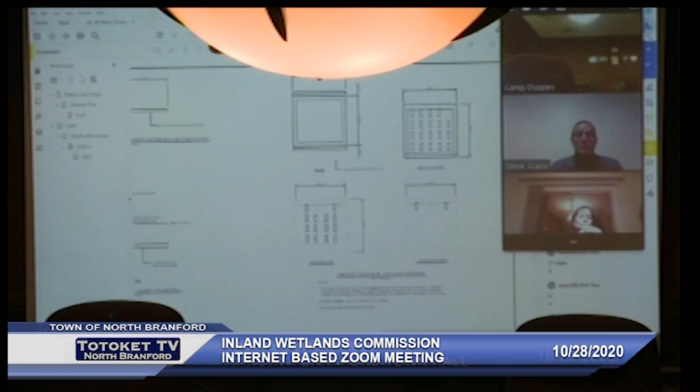May I ask a question at this point? Sure.

These galleries you're talking about, that's exactly the same thing I have for a leach field, 80 feet of them for my home septic. So are we talking here about just catching the runoff from the roof? Correct, correct. Is there anything else going into them? No, just the roof. It's a closed system, really.

If you think about it, the rainwater and snowmelt comes off the roof, goes down the rainwater leader, connected to a pipe that goes into the galleries, and that's it.

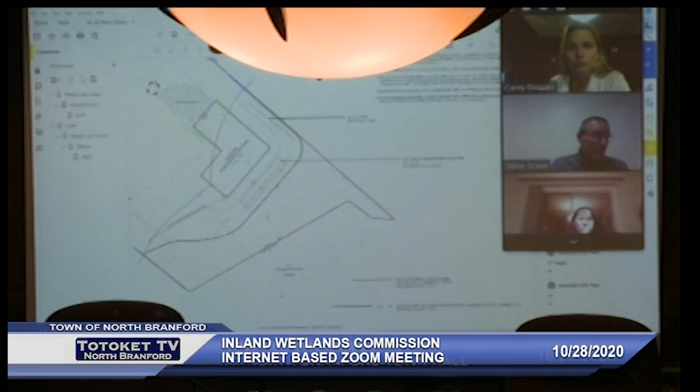And what kind of roof are we talking about on this building? The material? No, I mean the shape. Does some of it shed forward, does some shed towards the river, or is it a flat roof? I think it's 2 gabled roofs, Jerry. A ridge this way, and a ridge this way.

I believe there'd be gutters around the perimeter, here, probably here, I would think, here and here. And the square footage of the total roof space? I forget, but I submitted calculations to Kirk. I can try to find them while we're talking, but I did submit them.

The reason I'm asking this is because it seems to me to build this system to catch the rainwater in back may be more of a disturbance within the wetlands than is actually necessary. This seems pretty excessive just to catch rainwater. I'm not an engineer, of course, and I don't know that for a fact. But it just seems like you're talking about 4x4 galleries, 150 feet of them. That's an incredibly large tunnel under the ground. Is all of this really necessary, or are we overbuilding to satisfy certain regulations?

So every town now is subject to the Connecticut DEP's MS4 permit, the municipal separate storm sewer systems. You've probably heard the MS4 terminology. One of the requirements of that permit is that municipalities by a certain date include revisions to their land use regulations that encourage practices like this: low impact development practices, stormwater treatment and quality practices. I think the town engineer, when he requested this, is simply trying to meet those requirements.

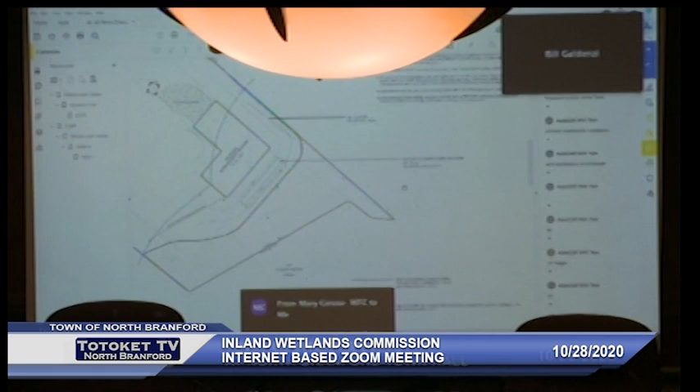So there's a couple ways to do it. The roof water could be allowed to be discharged to the ground, and when the ground surface is very flat, which is the case here, and where it's wooded and has a thick forest layer, similar to what we talked about at Fowler Road, the roof water can simply come off the roofs and be discharged to the ground, allowed to spread over that area and infiltrate into the ground. It achieves the same thing.

The town engineer requested a more formal infiltration system, that's why the galleries.

All right, well that's precisely where I was going with this. I was wondering if the discharge could just flow as a sheet through the forest floor and be infiltrated on its own. When we were working on the Shantz Farm development, we talked about an alternative development means, at the time called low impact development, which would have eliminated curbs from the street, eliminated culverts, eliminated piping of the water, and it would have all worked by sheet flow.

But it was felt at that particular time that the North Branford Town Works wasn't really set up to deal with that sort of development at the time. It was kind of new to everybody, and I think we were kind of slow to adopt it.

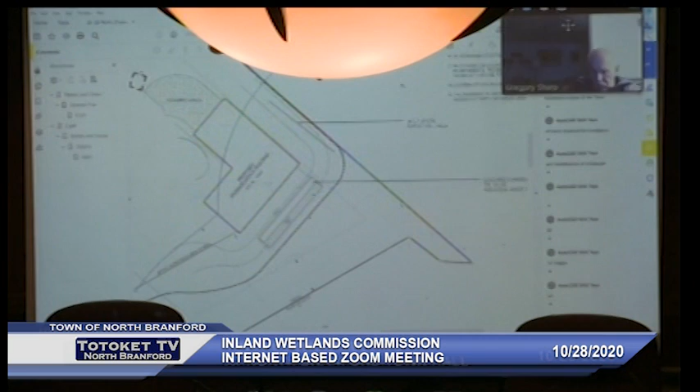It could, and Kurt's trying to. Nothing wrong with what Kurt requested. Kurt's trying to do the right thing.

The only perspective I was going to add is this is more common that we're seeing in some of the newer developments and projects we see on the zoning side that don't have really inland wetland impact. So you guys wouldn't see it, but we're seeing it more in zoning, and this is becoming more common.

This is not abnormal, Jerry. No, I didn't think it was abnormal at all. I actually fully agree that this is the norm, but I thought that there might be less impactful ways of addressing this that have just been slow to be adopted.

I'm thinking about what you've said, Jerry, and other alternatives, and as I stare at this, having been out there today and walked in the woods right down to the river.

What I would suggest we don't do is simply allow the rainwater leaders as a point discharge to just discharge to the ground. We would need to spread it out.

You kind of mentioned this, and on this particular site, it occurs to me, and I've just thought of this now because you just brought it up: to spread it out, instead of building these galleries underground, you'd have to construct some type of a level spreader. Exactly, much in the same location.

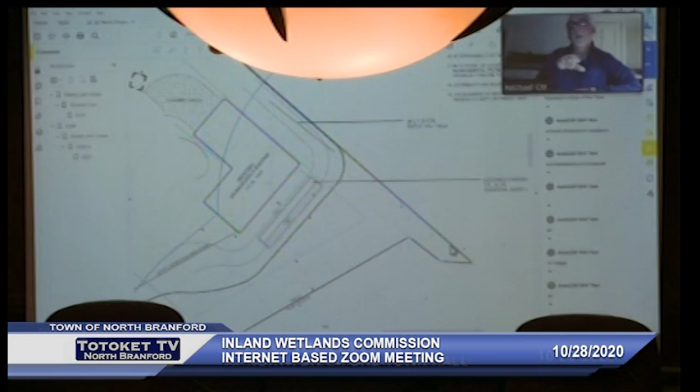It could actually, and I hope we talked about this. This filling and sloping is related to the installation of the galleries, in order to cover the galleries and then slope down. If these galleries went away, this back wall would have more exposed foundation, whatever material it is.

Concrete. When you stood back here and looked at it, you'd probably see, like you said, the top of the foundation wall would be around 153 and the ground's about 149-ish or so. So yeah, you'd see about 4 feet of exposed wall.

But no one would see that unless they were standing back here. Correct. But that leaves us with the galleries — we can't put those galleries down at the existing grade. They've got to be up high to stay away from the potential groundwater issue.

We have to provide a vertical separation distance to the groundwater table, and that's why I've got them set up high, and that necessitated the filling. So if you're correct, if you took these galleries away, you would not have to grade as much in the back of the building.

If we go to the level spreader option, we would still disturb the area, but we would not be raising the grade. We'd actually want that level spreader down at elevation 149 or so. So we'd still disturb this, but we would not be placing fill because we would not be trying to cover these galleries.

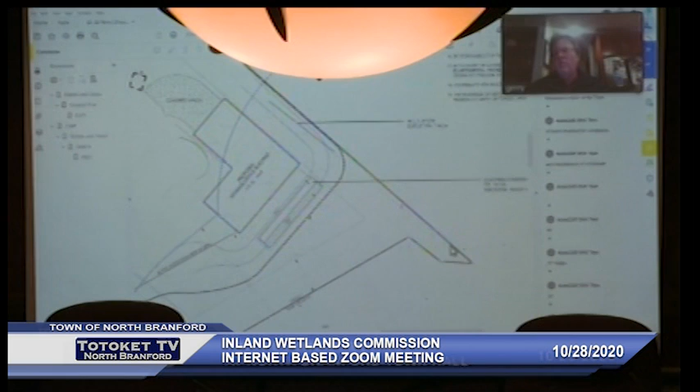Mike, one other thought that follows this discussion. Does Aquatic, I know they do a lot of landscaping services, do anything like rain gardens? I'm thinking they could put something like that in to serve two purposes: one, it would be an alternative like Jerry's suggesting, and also it could serve as a display point for the business. That's a good idea, Carey. I don't know if they do that, but that's a good idea.

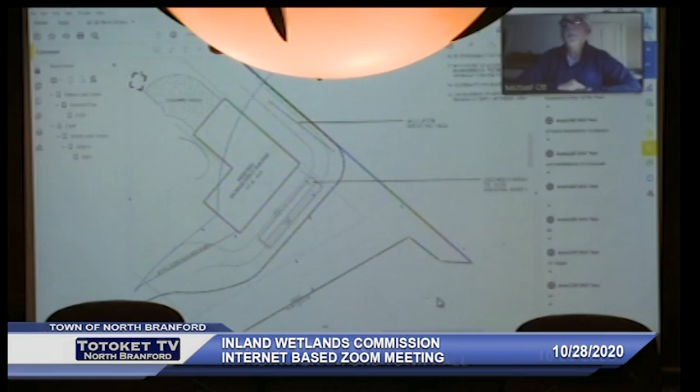In other words, the level spreader, I think what you're saying would actually be incorporated in a rain garden design. Right, and also serve as a display point, because I don't know if they'll be relocating the display walls, but they have the pools and everything else along with their stonework and fence work. That's a very good point, and relatively easy to do, and truthfully much less expensive than all these galleries. So yeah, I believe that could actually be done, as long as you're okay with, we still have that disturbance, but what we'd end up with is a rain garden, a vegetated area that's handling the roof water.

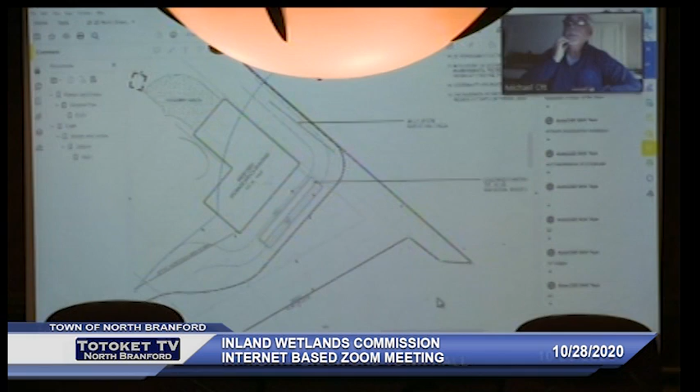Mike, were you able to talk to the owners and ask about a redesign where it's one straight building and up further so it doesn't disturb as much into the review area? I did, Ashley. The owner went through a process with his building designer, like most owners, with their program and their needs and requirements for what they want to do with the building. They did look at initially a rectangular building, and they did look at sliding it up, but my understanding is that their requirements for what they want to do within this building and the storage area they need drove this L shape.

One of the reasons it's back so far is the fence on the display pool. If you remember, there was a decorative black fence all the way around the display pool, which is required by code. So in order to get this L in, they only moved it as you can see here. This distance is probably about 4 feet off the fence. It's just enough room to walk between the display pool fence and this face of the building.

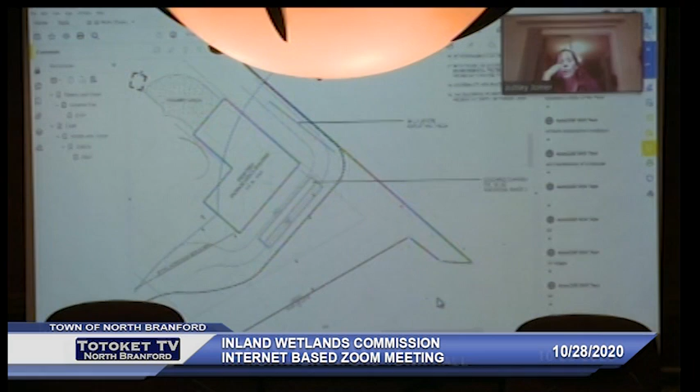So yeah, to answer your question, they did, but this is where they landed. So even though it might be comparable square footage, they needed an L-shaped building instead of even a rectangular one in the same square footage? No, I don't think that was it, Ashley. I think to get the square footage that they need, the building would be slid, it'd be up here someplace.

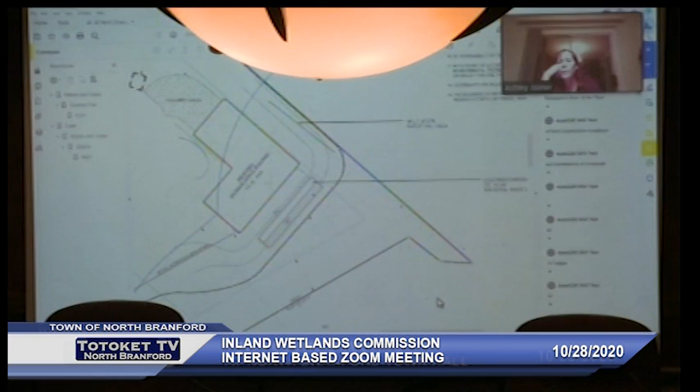They would lose their, let me pan down a little bit, their above ground display pools. I'll trace the circle, there's a circle there. Yep, and there's a circle there. This one they've got to relocate, but if they slid the building up there, they'd end up having to relocate both. Two instead of one. Okay, right.

But it's less of a disturbance into the review area, so that's why I'm wondering, if it's just to move two of their displays, can they be remounted anywhere? Well, I don't know where they could redo their displays. There's probably room, but that was their thinking, was to try to make sure they had, I think they would prefer, I'm trying to pan over here, prefer to have all their display in this area where they have it today. So that and the location of this fence drove the L shape.

As far as the location of that fence is concerned, I believe that the building, if it did slide up those 4 feet you're talking about, could actually serve as that portion of fencing, providing there's no doorway or window there. Yeah, the fence would just connect probably right to this corner, Jerry. Yeah, that's what I'm saying. So if it were an issue and you needed to slide the building those 4 feet, it wouldn't disturb the swimming pool display at all, it would just eliminate a small section of fencing.

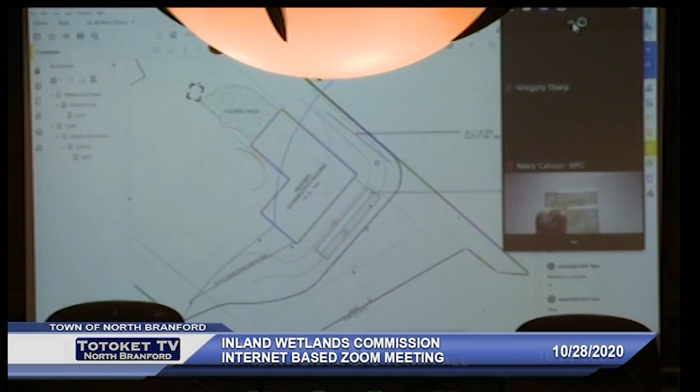Mike, were you able to find the sanitary sewer connection off to the side? When we looked, we couldn't find it, but have you been able to locate it? No, I tried again today, but actually Tom's guys, when I left, were still looking for it. So I'll have to report back to Carrie tomorrow. I told her this earlier today.

We know it's there because the surveyors located it, but I cannot find it. I kicked all around in the leaves and could not find it. So Tom Lodano's guys actually left, still looking for it, trying to find it. But we're actually not connecting at that manhole, Ashley.

We're actually up here. So it's not really part of, there's no work here. It's not part of the application. We're connecting to the sewer up here. But I did try, I told Carrie earlier, I did try to find it.

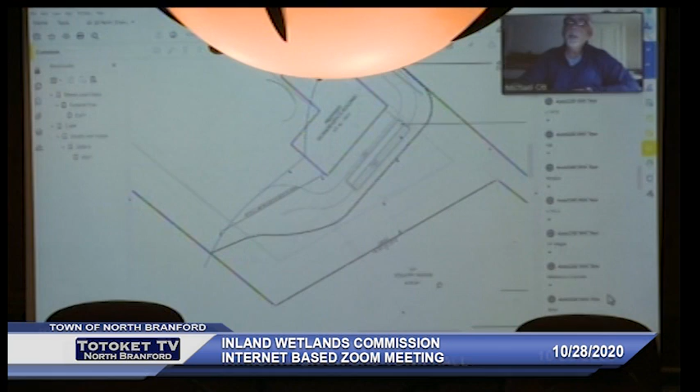I also measured to the river today, and I flagged all the trees that I think need to be removed. And I took photographs, which I could share. Carrie has them, I sent them to her, but I could try to share.

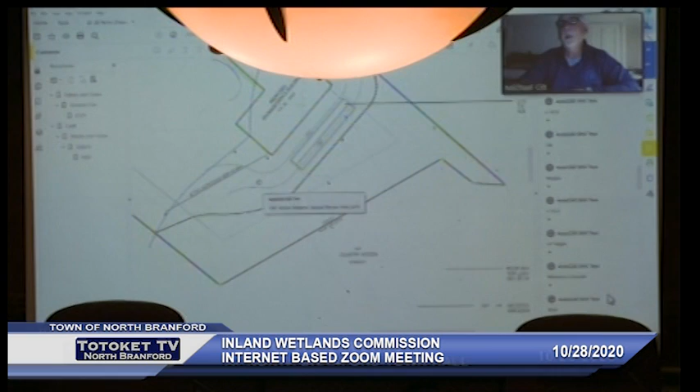Was your measurement to the river to the bank or to the center of the stream? I measured to the top of the bank, and it was about 71 or 72 feet from the front of this display wall to the top. I pulled the tape from the front of this long display wall to the very top of the bank of the river.

I knew it was within 100 feet. Yeah, definitely. And then I flagged it.

I counted 13 trees that would be removed. And I can show you those pictures. I think you'll be able to see the flagging on the trees if you'd like.

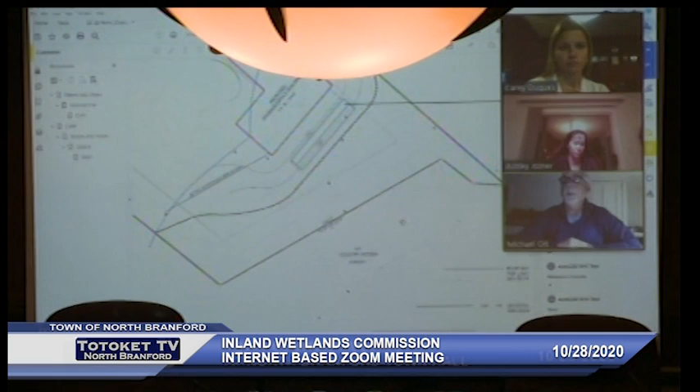You probably remember what it was like. Some of them are relatively small, a couple inches in diameter, but several of them are rather large, including that one dead one that I think Steve pointed out, or maybe it was Bill, I can't remember. Dying, I think. Dead.

So I think that's it in a nutshell. Unless you have other questions, I do think this can be done, Carrie's idea, and I can't see why we can't slide it up 4 feet to that fence either.

I'll have to talk to Tom. We'll have to look at and talk about the building design, but I would imagine we'd be able to slide it up.

I have a question, but I'm not sure, Mike, that you can answer it because I don't think you were involved with the project at the end of Ciro Road, were you? No. In that project, we had actually gotten them to turn the proposed building around and put the back of the building against the wetlands.

And I'm wondering, how did we address handling the roof runoff in that project? Does anybody remember? I believe it was through... I'll have to look. They might be connected to the detention basins because there was a basin. Yeah, I think it went into the basin. Okay, great.

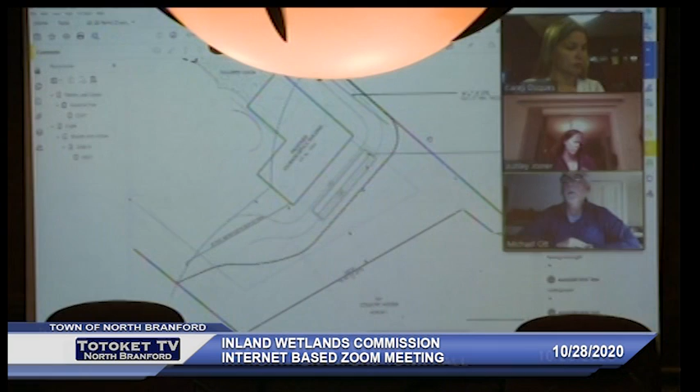So at this point, is there any other comments or questions from the agency members?

I just was wondering where we should proceed now. Should we allow Mike to go back to the applicant and express, run by some of the two main ideas, basically going to maybe a level spreader and maybe moving the building back 4 feet. Those would definitely seem to be two things that would

be encouraged by the agency at this point. So unless anyone else has any other comments or concerns, of course. I'm fairly comfortable with this whole project. I would like to see the galleries dispensed with. I'd like to see as little impact as possible.

But for me, none of this is a deal breaker. I think that any way that they go forward with it is going to be minimal impact on the environment, and I'd be okay with it, but I would certainly like to see lower impact if at all possible. And I like the idea also of the water garden and natural spreading of the roof water.

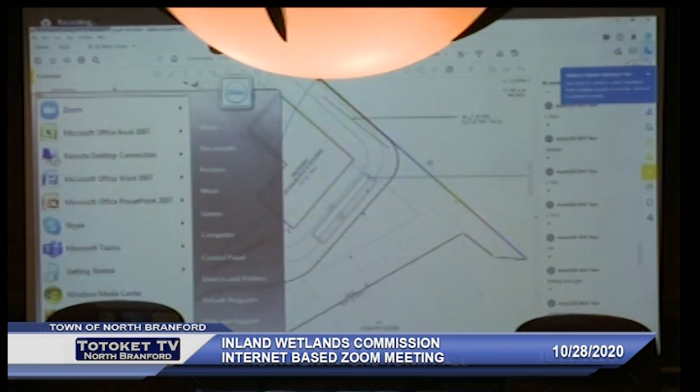If I could add, sorry Bill, I think I can safely say that the applicant will agree to the rain garden level spreader in the rear and sliding the building forward. If the commission was inclined to act tonight, I think that would be helpful, actually, timing wise. How do the other agency members feel?

I mean, I think that sounds reasonable to me. Is anyone else okay with that, or something we should consider? I guess my only question is, does Kurt have to approve the roof runoff through the garden? I mean, I would think it has to go through Kurt too, doesn't it?

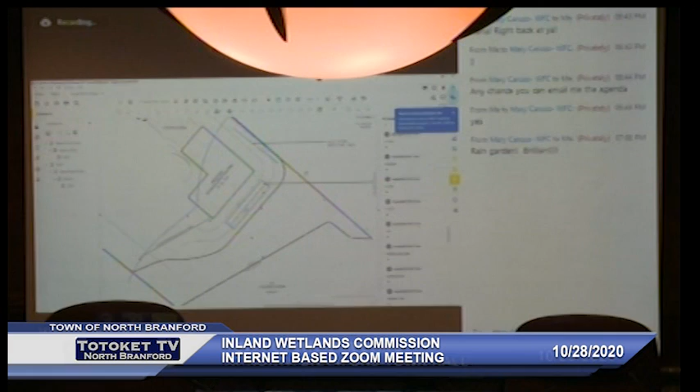I think that serves the same purpose. I don't know, what's your feeling, Mike, from an engineer standpoint? I would say, having been an engineer, I would say that Kurt will be fine with it, because Kurt's goal is, as is Carrie's, every municipality has to implement the MS4 permit requirements.

And you know, as I said earlier, the rain garden level spreader idea is just another way to do it. There's no real difference in the function or the outcome here. The whole idea is to promote the infiltration of water from impervious surfaces. That's the idea.

It's not, in this particular case, a water quality issue because it's roof water. Roof water is considered clean by DEP and in the stormwater quality manual requirements. The goal is to promote the infiltration and recharge of water from proposed impervious surfaces, which is, believe it or not, way back when we did the main building, is exactly what we did.

That's why we put, before there was a requirement, we put these galleries under the ground here. We did that because we're in the public water supply watershed at the time. Today, we're still in the public water supply watershed, of course, but now there's a municipal requirement to do this kind of thing.

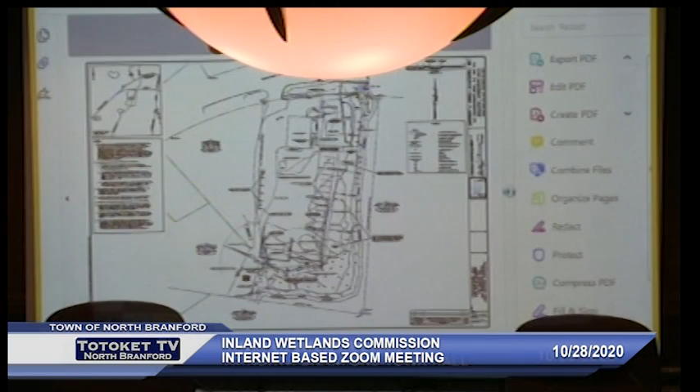Sorry, bear with me one minute. Carrie, your computer sounds like a Commodore 64. Yep, it's a little outdated here, but I'd love to say I don't know what a Commodore 64 is, but I actually know what one is. Yeah, so do I.

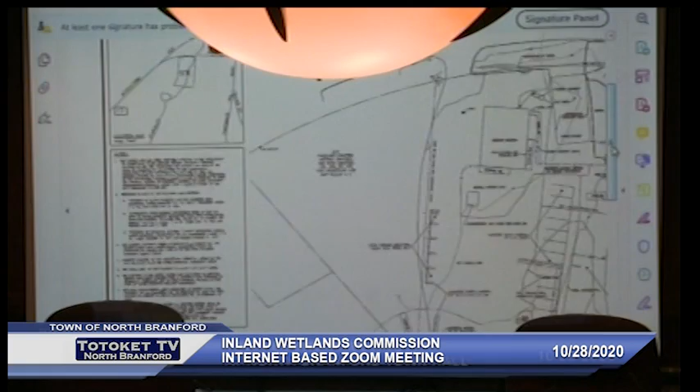Okay, Carrie, thank you very much. Okay, you can see it. I'll try and zoom in. The first thing I'd like to say is the first thing that we have to do is move forward and remove the stockpiles and everything that are currently on site. Joe, if you're available, you may want to jump in and give us some timing for that.

But our intent with the presentation of this plan is to contain all of the future area stockpiles within the existing paved area. I did some research, and I also shared some photographs, aerial photographs, with Carrie with respect to that existing paved area, going back to 2004, which was a little difficult to view because it was kind of washed out, being a black and white photograph. Would you like me to share those, Mike?

If the commission hasn't viewed them, it might be helpful just to see what was there. Okay, so this is the 2004 aerial view. Yeah, and you can't see a lot. That, unfortunately, was a black and white photograph, and it's kind of washed out.

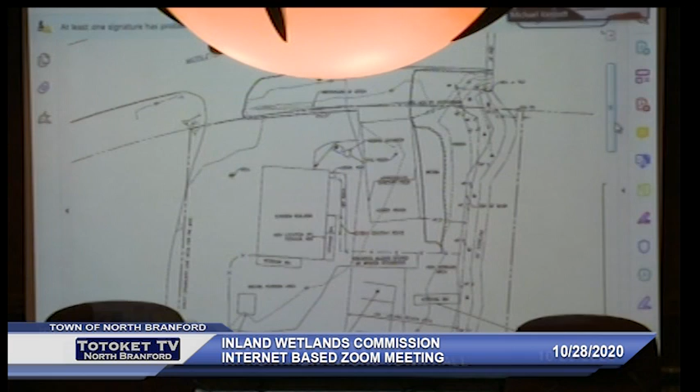On the site plan, we do show the edge of the existing pavement. What we're showing are 3 separate storage areas: 2 on the south, 1 on the east side, for wood chip storage, topsoil storage, and a fill storage area. Then north of that, you'll see some parking spaces. We made them oversized for trucks, 15 by 30 feet, so that will allow the trucks that are part of the business, whether it be the landscaping or the excavating, to have a designated area to park. For the most part, the space that we've outlined on the plan is approximately 10 feet off the edge of pavement.

If you look a little bit on the west side, we have some storage bins that would be areas where they can put their landscape sand, stone, in smaller quantities, because they might dump a truckload or what's left of a truckload when they finish their work on a job site and store it there till they pick it up and go to another site a few days later.

All of these storage areas we're proposing to outline with concrete traffic barriers. The barriers will be placed in the positions shown here. They are generally about 10 feet long, 2 feet wide, and 2.7 feet high, and that will contain the material that comes on and off the site on a regular basis, not be dumped erratically in piles around the site like you see now.

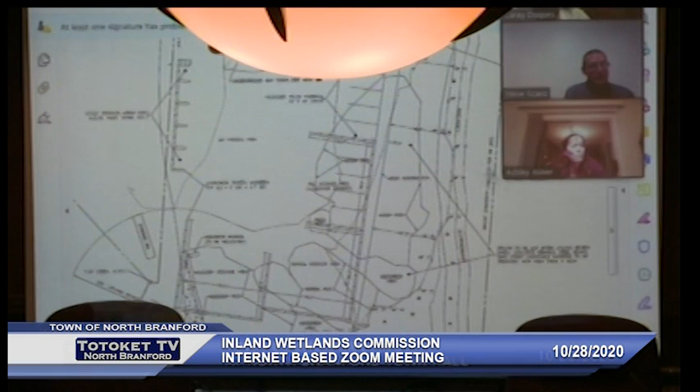So primarily, if you look at the area on the east side of the pavement, the paved parking area, you see a disturbed area and a stump pile. Once that is cleared up, we would propose to spread topsoil and seed it. My recommendation would also be to take some of the wood chips on site and place them from the edge of pavement about 10 feet easterly, around 6 to 8 inches thick, so that those wood chips could be used to catch runoff from the pavement and filter it before it gets to our newly planted grass areas.

Ultimately, we're not planning to create lawns in that area. Our intent would be to mow it probably a couple times a year so that it isn't overtaken with brush and briars and all the invasive stuff that has a way of finding itself into these areas the minute it stops being maintained.

And again, on the south of the storage bins, you'll see in the middle we have a substantial amount of pavement there. We plan to leave that in place and again place some wood chips to back up our traffic barriers, just to protect that area and give us a firm area to go in if we have to do some maintenance there, like cleaning up spillage or something that goes over the bins.

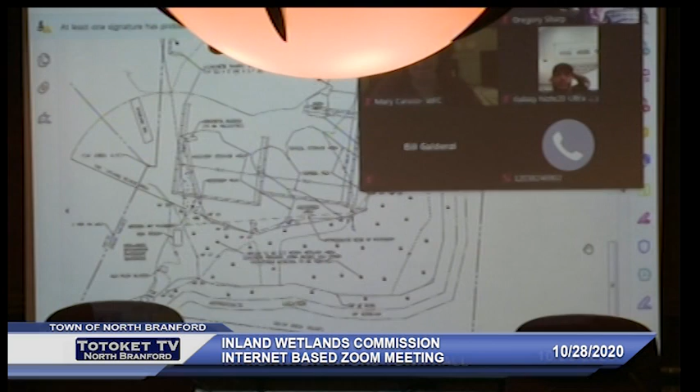I would venture to say that it's been there for years. We would propose to go in and remove that, but not regrade the area. Just take the pieces of concrete out, take the steel beams out and dispose of them. And then let that area return to a natural state. Again, we are suggesting that we cut it twice a year with a brush hog or something like that, just to keep the invasive species from taking over out there.

And then on the west side, you see the bituminous pavement areas, the pavement piles that have been placed there by the adjoining property owner. You'd see the upland review area goes onto his property, probably 40 to 50 feet. So I guess what I'm suggesting is that maybe the commission could write him a letter and notify him that he has materials placed within the upland review area and ask him to remove it.

I think ultimately, in my opinion, as a land surveyor, this area where the neighbor is encroaching may ultimately run into a civil action by one owner or the other, but I can't say that definitely. But usually when things like this happen, it's not something that is that easy to take care of.

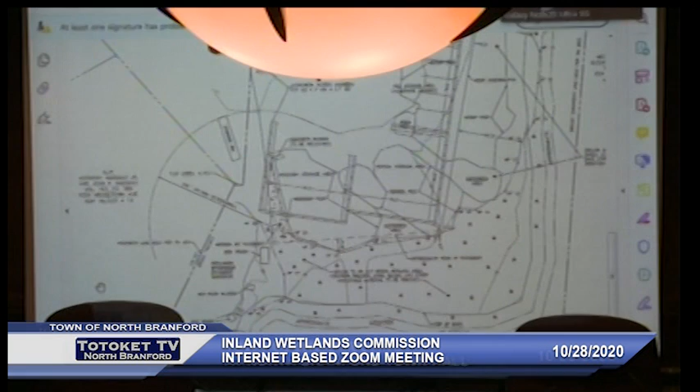I don't want to interrupt, but keep in mind, it's a big job, not a little job. So we all want to be on the same page. We don't want to do something there and then have to go back in and do it again. We just want to go in, get approval, or whatever we have to do so we're on the same page, and then we just want to blow it out and be done with it.

Keep in mind, right, so what he's trying to say is he'd like to, if this thing got approved, get in there, hire the trucks. The same trucks could haul stumps out, then haul mafia block in, and get this on track fairly quick. You don't want to do something, then have somebody not happy with it, and have to do the work 2 or 3 times. It's very expensive. We want to do it once, that's all.

I understand that, but still, we've been working on this almost a year, right? A little more, well, and this is not the first time because we discussed this project a few years ago. In my business, I'm a site contractor, so we always follow some type of plan. At the end of the day, this is nice, this is the first time really seeing it all done. Now we all have a vision, you know what I mean? At the end of the day, we all know what we're doing, everybody's on the same page. Before it was move the stump there, move the logs there, we just want to do it once and be done with it.

Okay, so you got the plan. What is the timing? Chris, what do you say, months or years? No, it would not be years. We're talking, we'll blow this thing, we'll take probably a 90-day period from the approval. 90 days from approval, okay.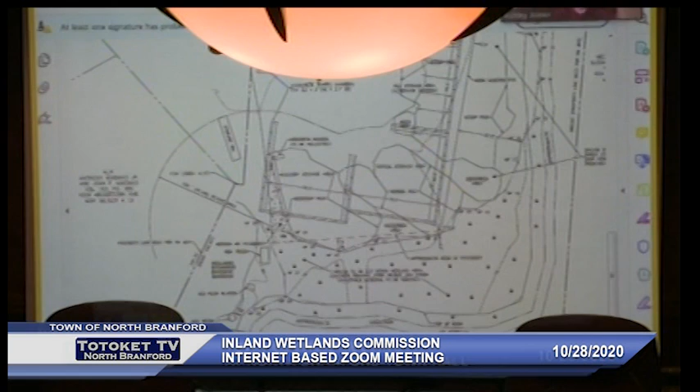Okay. I don't think I can... maybe I can. Can you see that? Just a gray screen, no, it's just a gray screen. We can see the itty bitty little JPEG image at the bottom. I don't know why it's not coming up full size. Yeah, that's it, I see that. Because this computer's from 1982, it is a Commodore 64.

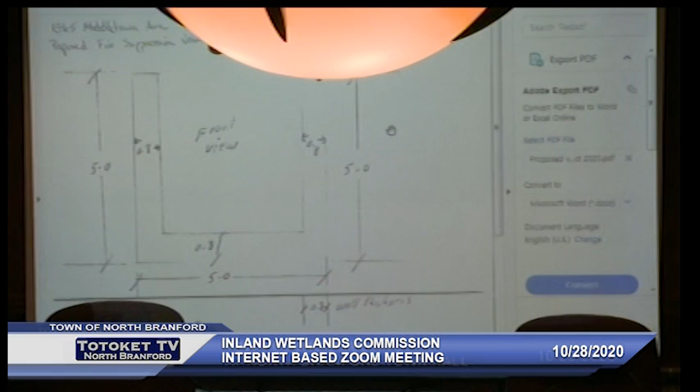So the vault is proposed in this general area, again along this river embankment but set at the lowest level of the river. I wish he was on here so he could explain it a little better, but this is the sketch that I received. Can you see this drawing? So this is the front view—it would be 8 inches thick, 8 inches tall, and 5 by 5 by 5 with this notch.

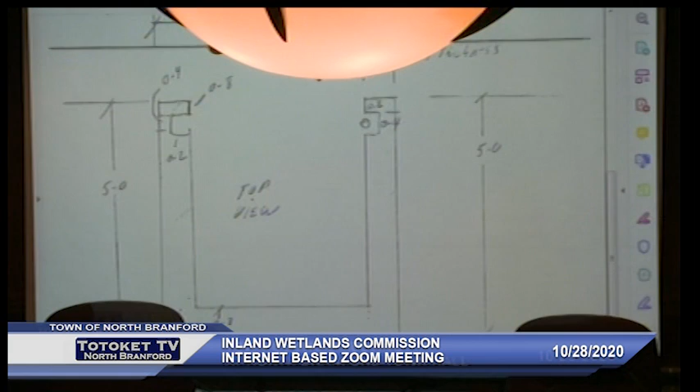Again, I'm not doing well explaining it because it's not really my project, but this is the general gist of it—that's kind of the main point. And would it stick out of the water? Well, it would be 5 feet up, so yes, I think at points it would stick out of the water, and there would be a pipe connecting to it, where the fire department would connect.

Again, if there was a fire they would be able to draw from that vault. I do agree with you—I think the best thing would be, since this is something different, maybe to do a site walk to see it. I'm not against it, I just would like to learn a little more about it. I'm glad to hear the fire department is supporting this, but it'd be nice to go and actually see it, since it's a structure going right into the Farm River. Agreed.

Hold on. There. Let me,